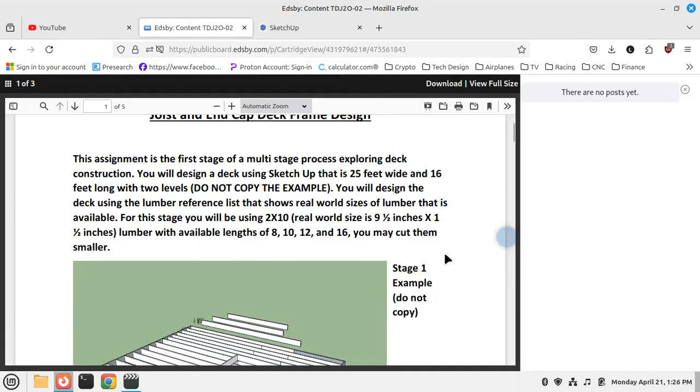We're going to be using 2x10s, which in real life measure 1.5 by 9.5. We're going to be using the lumber pile, which is part of what necessitated the updated video. Previously we were drawing our own boards. With the advent of the lumber pile file that can be found in the library section of our Edsby page, it eliminates any chance that the wood used sizes are incorrect. So we're going to use the lumber pile, once again 2x10, in real life 1.5 by 9.5.

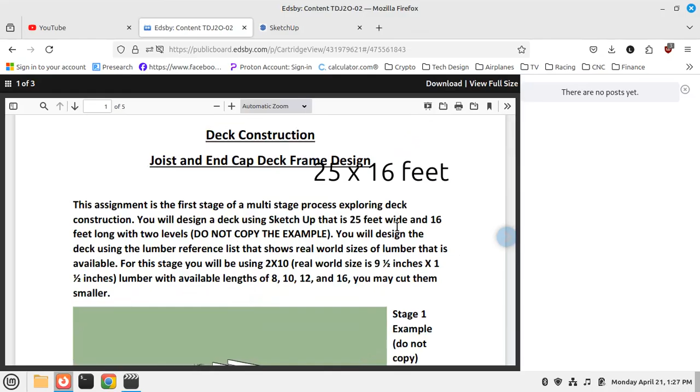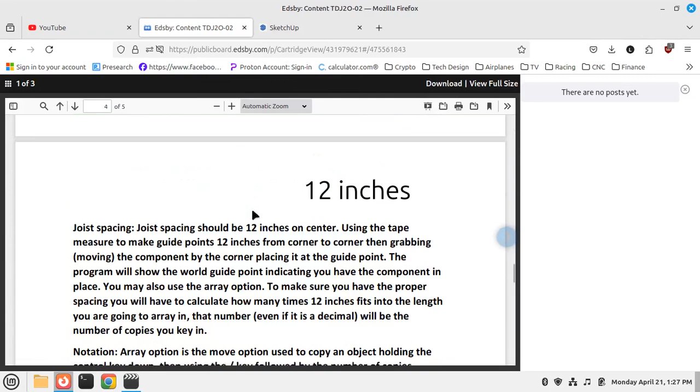We're going to be creating a deck which is approximately 25 feet wide and 16 feet long. Now those sizes are approximate, give or take a foot or two. The reasoning is to eliminate the possibility that someone's just going to create a very, very small deck. And our spacing between the boards is going to be 12 inches, on center, or from beginning to beginning, depending how you interpret that.

So I'm going to go over to SketchUp. I've already imported my lumber pile. All the different boards here are labeled. There's our 2x10s, there's our 4x4, which we'll use in a later assignment for the deck. So there's a lot of different ways you can go about this.

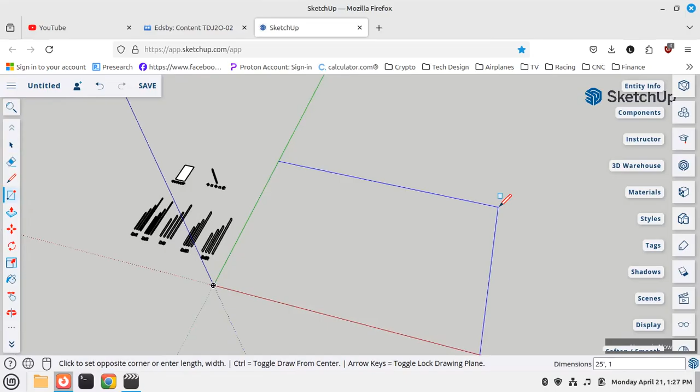So what I'm going to do is I'm going to actually start out with a rectangle, 25 feet by 16 feet, just to give me a rough idea. Now you can choose to keep the inside or you can get rid of it, it's up to you. So what I'm going to do is grab my longest 2x10 here, which is 16 feet long.

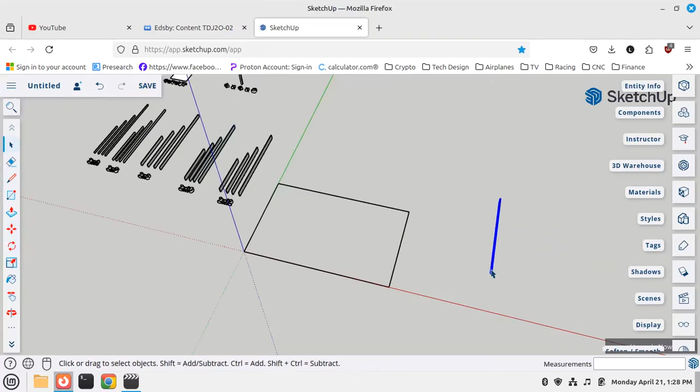And I'm going to first do the front and the back. Okay, so let's highlight that. Before we go too far, let's make that unique. I'd like to keep my lumber pile intact, so by making it unique, it makes sure that the lumber pile stays as it should.

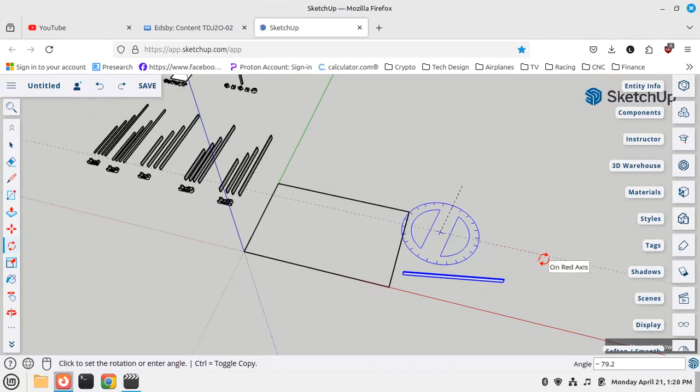We're going to rotate that 90. And what I'd like to do, and it's mentioned in the instructions, I'd like the front board and the back board to span across the front, okay? And you'll see what I mean in just a sec.

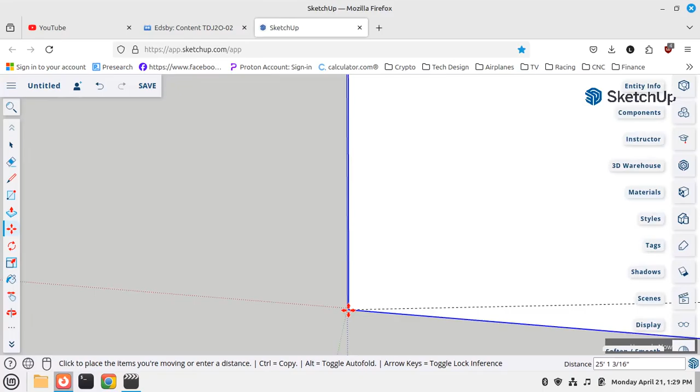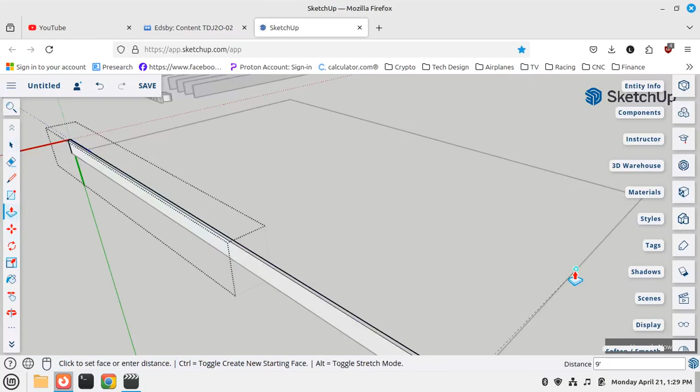Now the instruction mentions different board sizings, staggering. With the update, we've decided that as the designer, you don't necessarily have to get into board sizing. That's going to be left up to the person creating the deck itself.

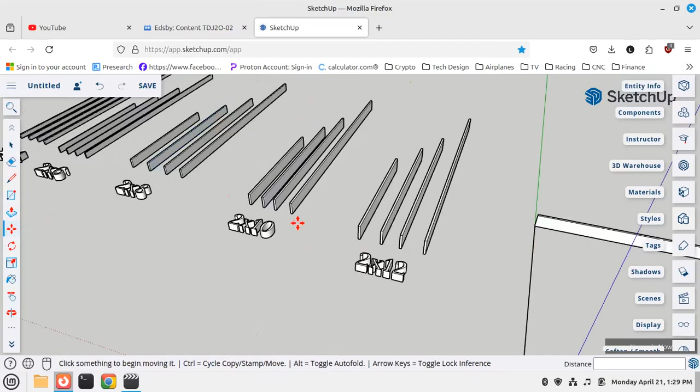So we're just going to pull that board and make it span the overall length. And let's grab another board over here. Please note that I'm grabbing it by the corner, and I'm dropping it off by the corner like so. SketchUp wants to kind of grab it.

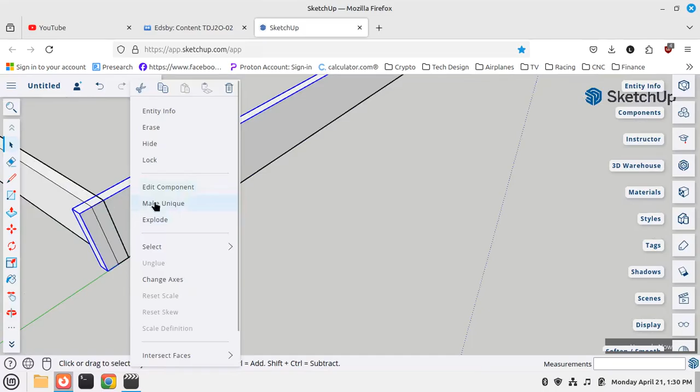So for this one, what we're going to do is first make it unique, then we're going to edit this component. I'm going to just go from here to here, and let's push this. Actually, let's undo that, I made a mistake. We want this whole board to be out of the way, like so.

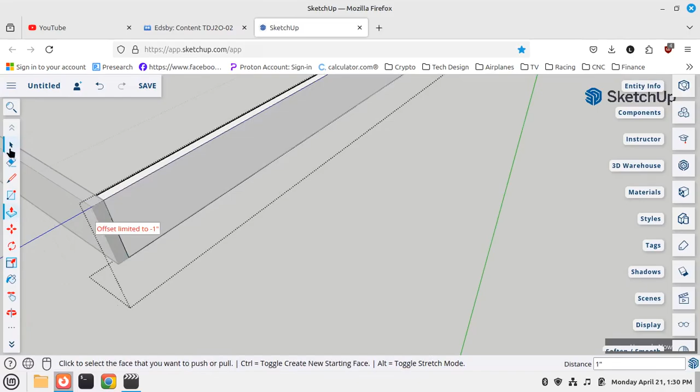We do not want to have board overlap. If you have board overlap, you would lose marks for that, okay? Now what I was talking about with the boards in the front and the back, when you look at the deck like this, you want to just see the board rather than this junction. So you want the front board and the back board to span from left to right.

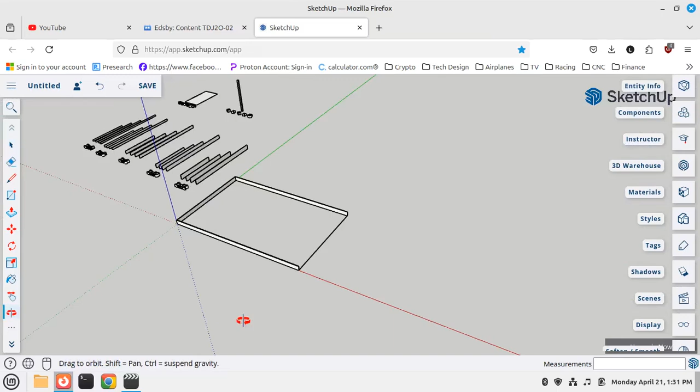Now let's grab this board over here, and we're going to bring it over to the end, like so. Now this is our basic shape.

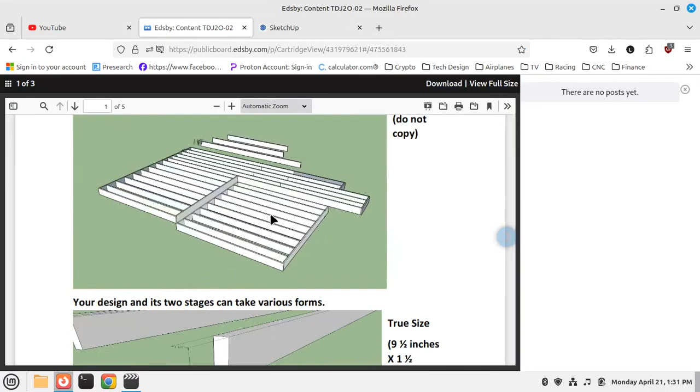Now if we go back to our instructions, there is a lower portion. So part of the instruction mandates that somewhere, somehow, there has to be a lower level. Now the size of that lower level is up to you. So what we can do is we can look at this here. Now I would go with nominal numbers, meaning like even numbers.

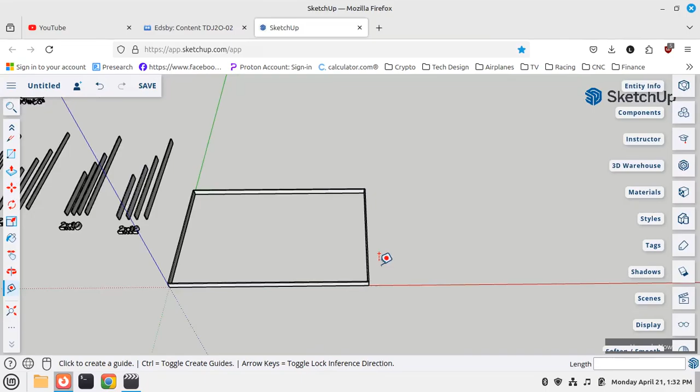Okay, so what I'm going to do maybe is I'm going to say, let's get my tape measure out. And it could be anywhere. That lower level can be in the front, the back, the side. It could be the entire front, the entire side, it's up to you. So here's what I'll do.

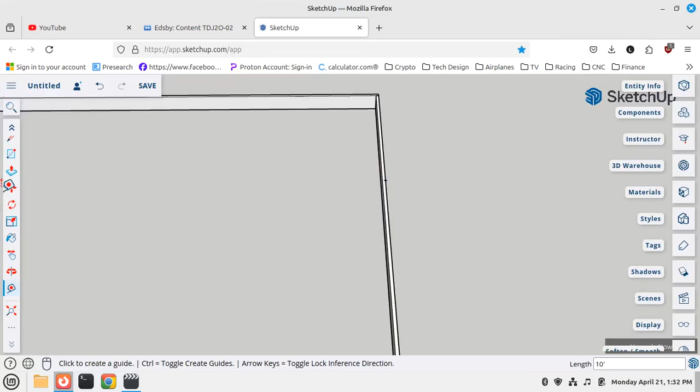Let's just go up here. Let's say, let's go up. And I'm going to go up, let's say 10 feet. And there's 10 feet. So I'm going to bring that around here. And let's bring it down. And let's go over, let's say another 10 feet.

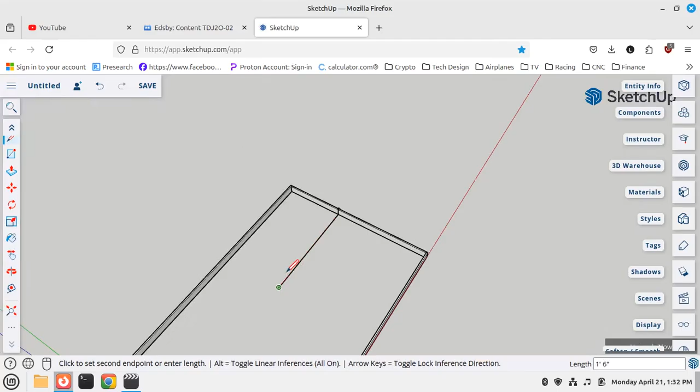Keep our numbers even, okay, that's going to be our lower level. Once again, you can put this lower level in the middle, on the other side, you can put it in the back, you can have the whole front, the whole side, it's up to you.

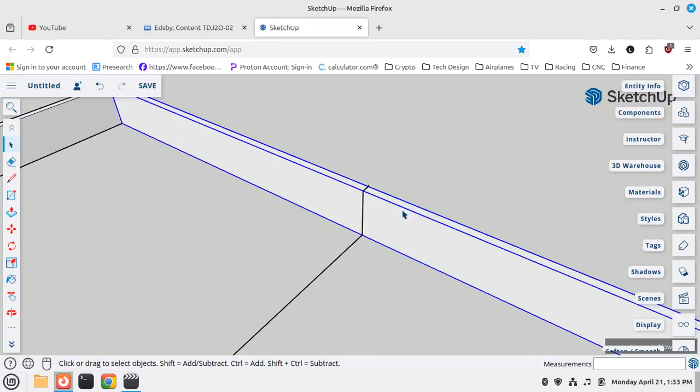Okay, so now what we're going to do is we're going to trim these boards to accommodate. So let's make this unique, let's edit this component. Now, I'm not sure if you're paying attention - when I created these lines, I was not doing it inside edit component mode, so it's outside the active. So I've got to recreate that line and do it in edit component mode.

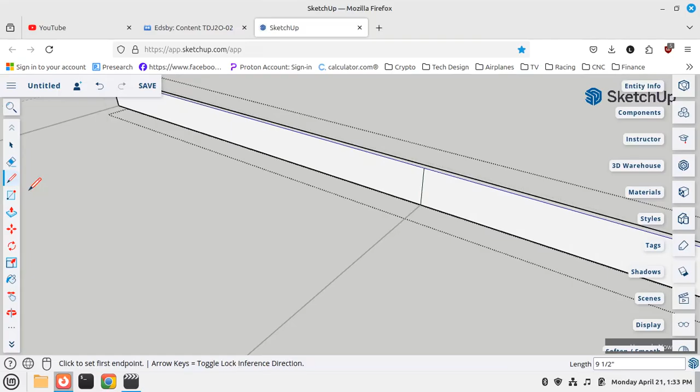Okay, let's cruise over here. Let's activate this, make it unique, edit this component. Oops, just a little off. And there we go. Let's push this out of the way.

Okay, I slipped out of edit component mode for a second there, my apologies. Now you've got the outline for your lower level.

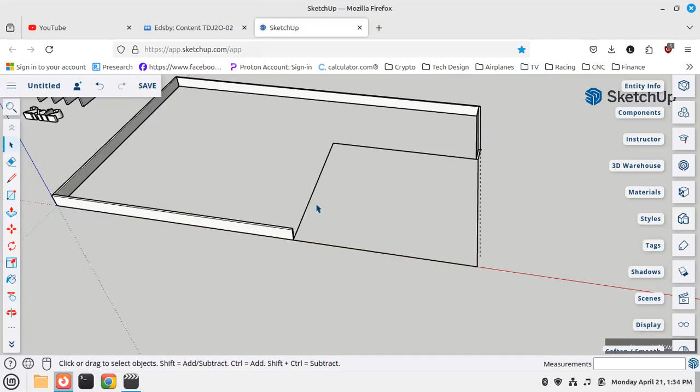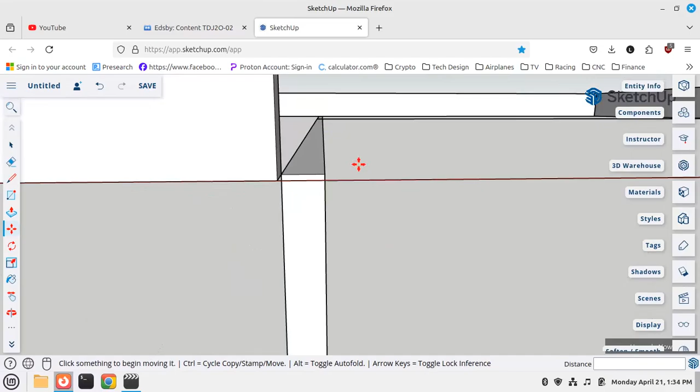I want to start with creating this. There's a spot here where people tend to lose a mark, so let's eliminate that possibility by highlighting the right way to do it. We're going to go to the back here because we want the front board to span across the front. This board sits next to the end of that board, okay?

Where some people lose marks is what they do is put it right here underneath. That's not the way to do it. The reason being, the boards that go on top need something to screw onto, and if it's underneath the other boards, that can't take place.

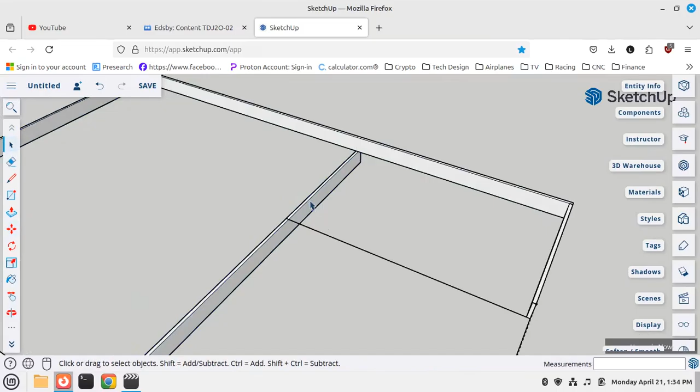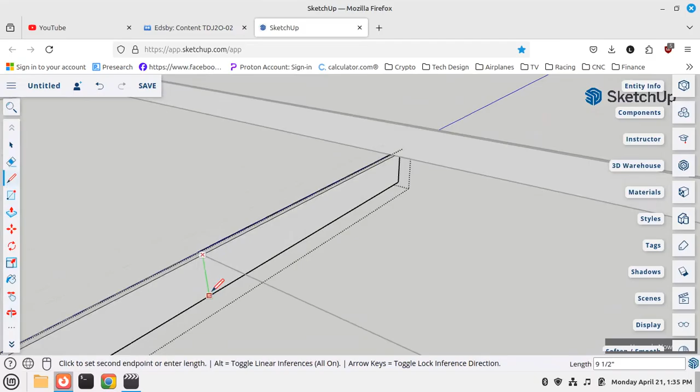Okay, let's trim this board up. We're going to make that unique. Let's go into edit this component. Let's grab our push-pull option, and we'll push this out of the way. Wonderful, okay.

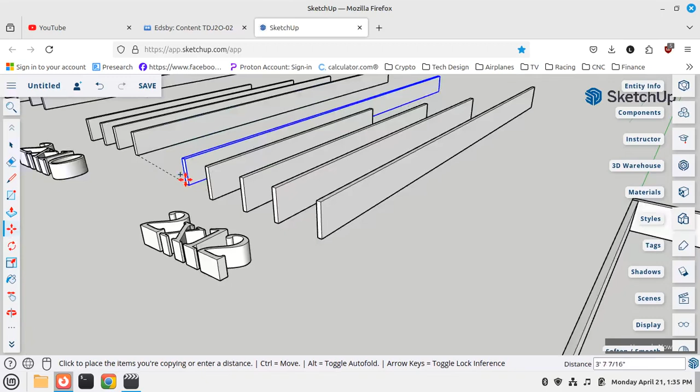And let's grab another board. We're going to put it in the front, and we're going to put it in the back. Let's see, we'll just go like so. Make it unique before we get too far.

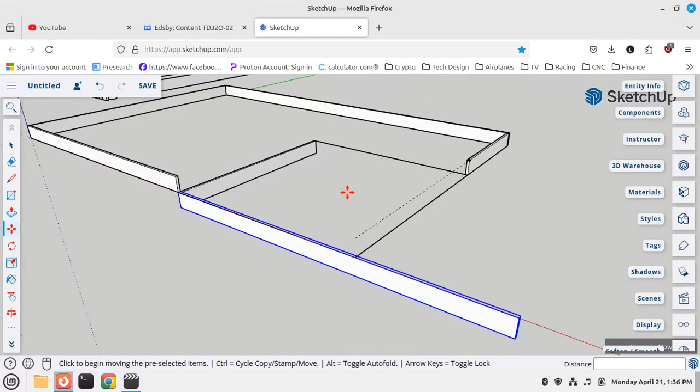Now we want this to span across the front. Let's edit this component and get rid of this portion here.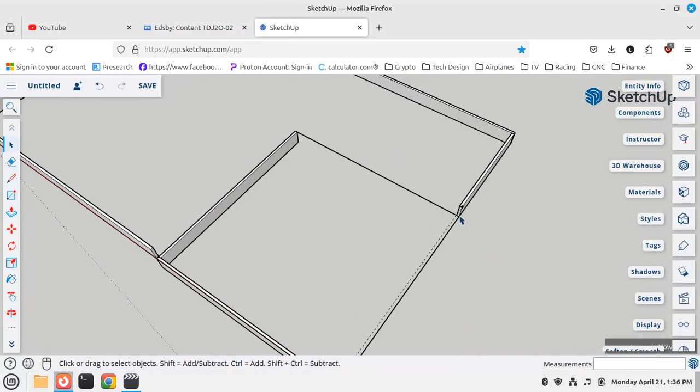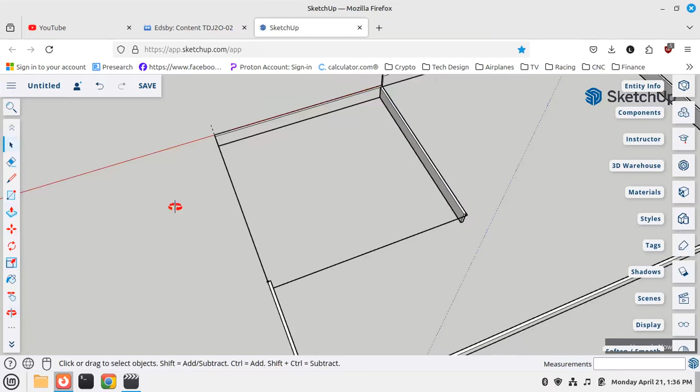Now we do want the board to sit on the outside once again, so we don't lose any marks. Just to make everything even, let's push this in 1.5 inches so that the back board and the front board are the same. Now, if you chose the back board, if you chose not to do that, you would not necessarily lose marks, if you trimmed it, but it still has to sit outside of the other board. It just makes all the boards the same this way.

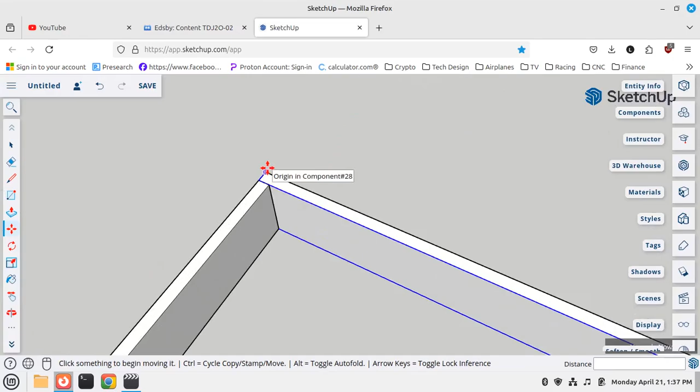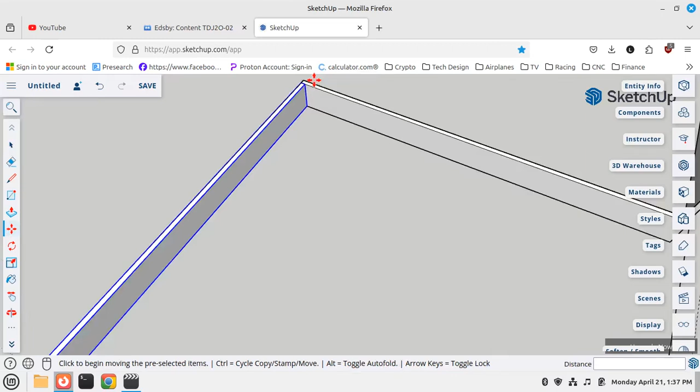Oops, we didn't quite get a good quality copy on that one. Let's make sure we're not eliminating boards. Okay, now let's copy this over, like so. Now we've got our rough outline of our deck.

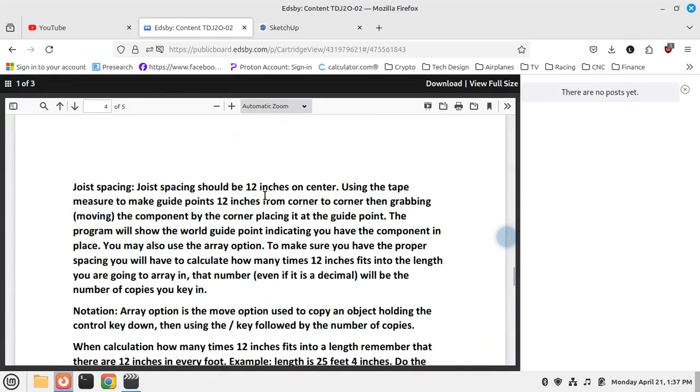Now what we have to do is create the interior supports, and they're going to be spaced 12 inches on center, or from beginning to beginning. Now, because I made this board a little shorter, it means I can use this board to go all the way across. Otherwise that would not be the case. So let's go over here, we'll start with the bottom.

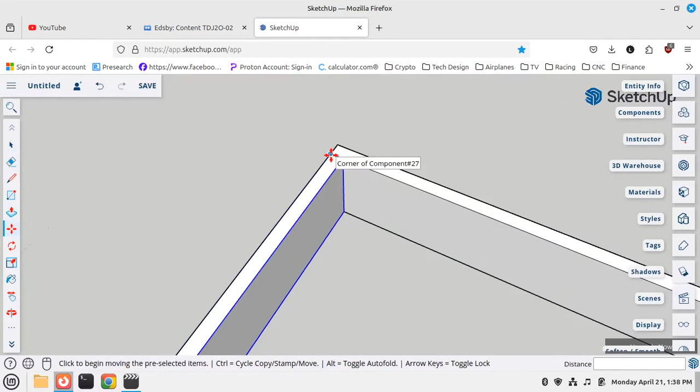Let's make this blue, just to eliminate any kind of issues. Holding Control, and as I move away, I'm letting go. Now I am not clicking the left button on my mouse, I'm just keeping it on that line. I'm now keying in 12 inches. Now I've spaced that 12 inches.

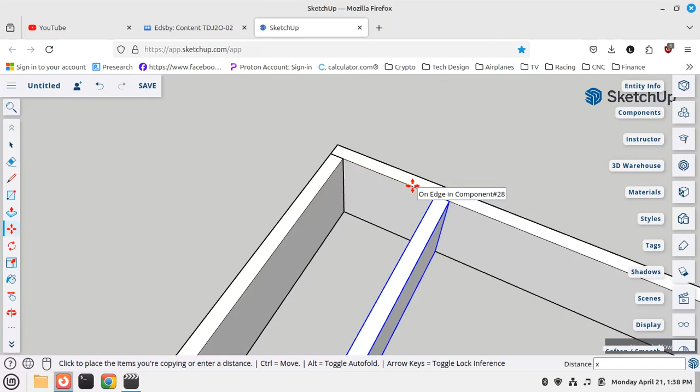Now, to save time, while it's still blue, I'm going to hit X. Now I'm going to guess how many boards will fit inside there. It was 10 feet, I don't know, let's go with 13. Enter, okay, now you've got 13 copies that are 12 inches apart. Obviously we've got too many, but it's better to have too many than too little. That's how you would go about creating those spaces.

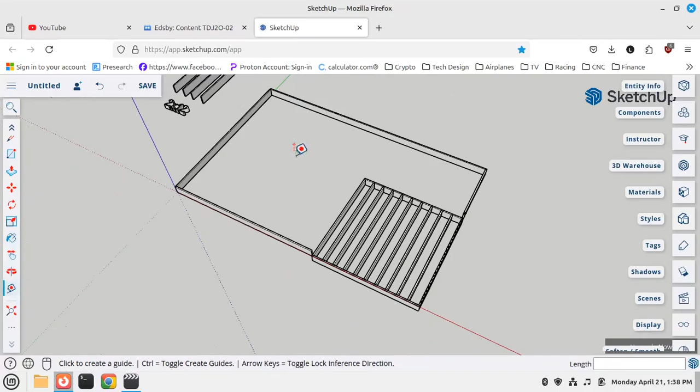Now I'm going to do the same thing over here. The only thing is, I only want to go with these very long boards to here. Also, I'm not completely finished with my framing, I got a little bit ahead of myself, but that's okay. I'm going to go like so.

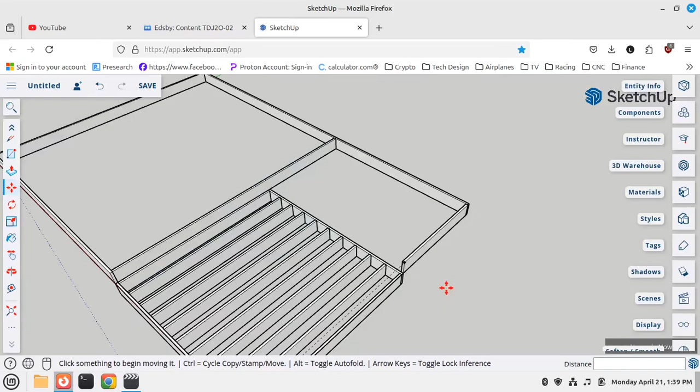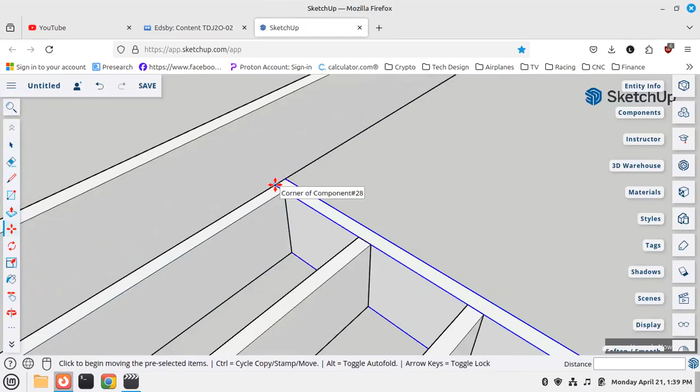Let's copy this one over, and we're going to go to there. Let's grab a board, and let's grab this board here. Okay, and we're going to put that board over there. Once again, notice this lower board sticks out, it's not underneath the upper board. That's really important. So let's trim these up so we can finish creating the internal supports.

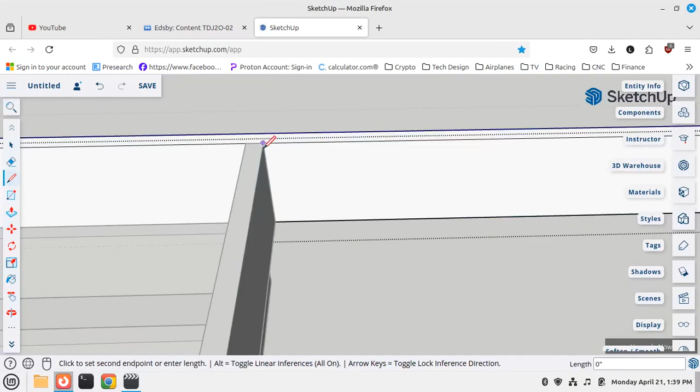Okay, we're going to edit that, we're going to go here to here. That board's done. Now this one just requires a tiny bit of a trim, but we're going to make it unique before we do that, because we did borrow it.

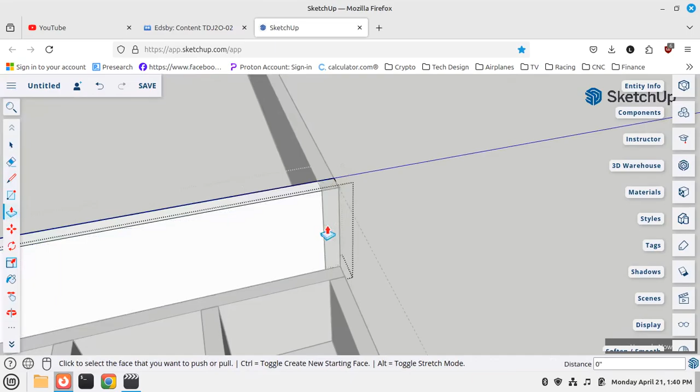Let's get into edit component mode and eliminate that overlap, which would create a mark loss.

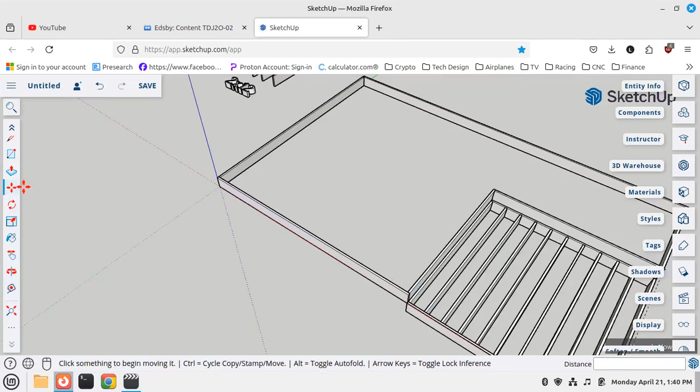Now, let's grab our tape measure really quick, just to give us a rough estimate of what size we're looking at for this. It's approximately just a little under 15 feet. It'll help with my guess, maybe, as far as how many copies to create. So the last one was 10 feet, I went with 13, that was too many. So let's try to get a little closer.

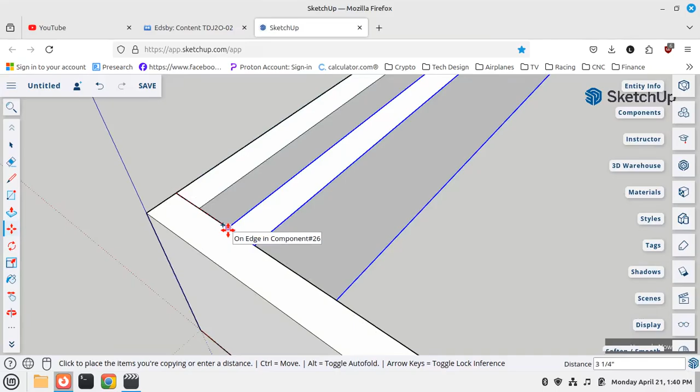Okay, so let's key in. So what I did was I held Control, I hit the left button, I let go of Control as I was moving away. I'm going to go 12 inches, enter. I'm going to go X. Let's go with 16, enter. X 16 - there's a couple too many.

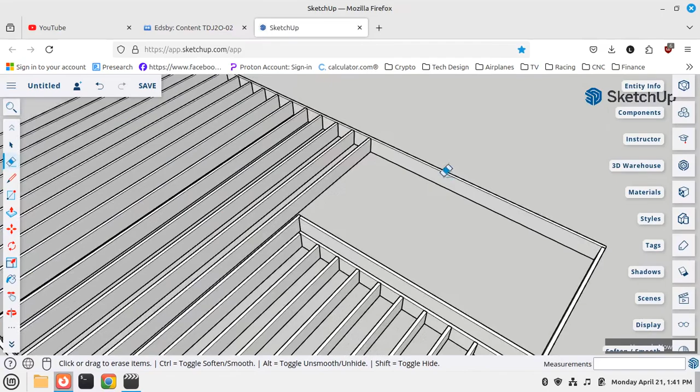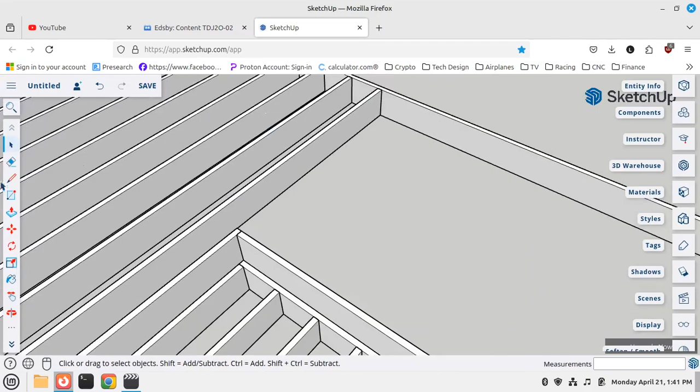Let's go here and here. Now for structural reasons, let's see, here's what we'll do. Let's just get out our tape measure here, and I'm going to measure over, let's see, just put it on there, type in 12 inches, enter, and we've got our mark. So we can continue in a uniform way. Okay, just like so.

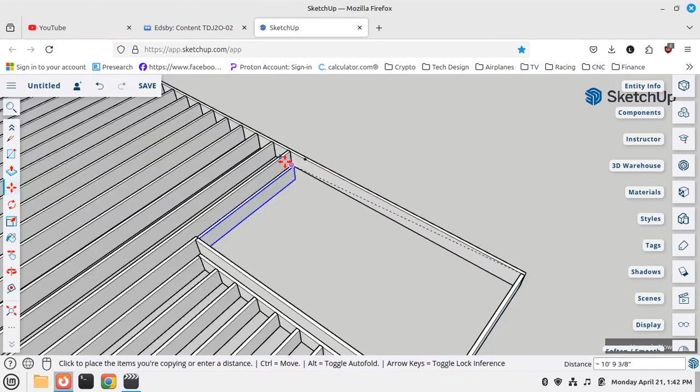Let's make that unique and edit that component. Okay, like so. And we can just go here and then boom.

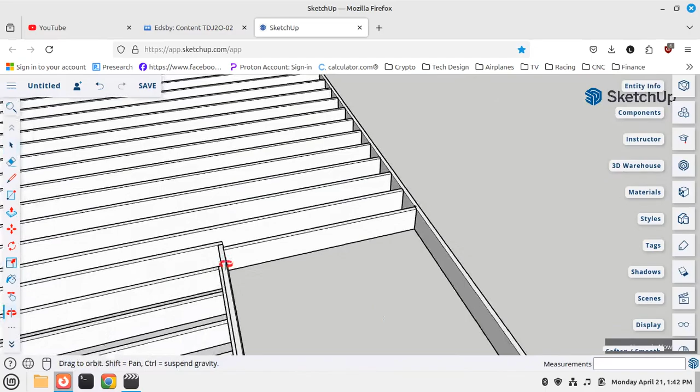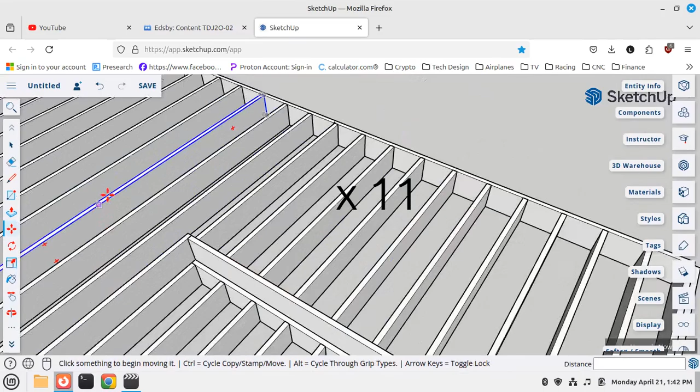Okay, so that's approximately a 10-foot span. Last time I went with 13, that was too many. So let's first key in our 12 inches, enter, then X, let's go with 11, enter. See if I got a little closer. Well, I'm closer. Okay, so let's eliminate the ones that we do not need. Now that sums up deck assignment 1.